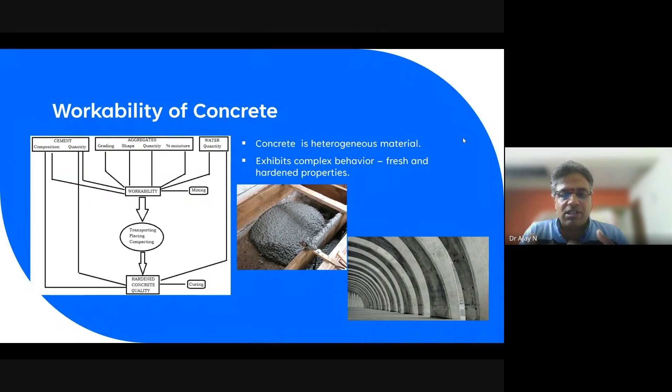As industrialists and structural engineers, we concentrate more on the strength part rather than the workability part, because we require M20 grade, M25 grade, and today we are going with M80, M120 and like that. We are very concentrated on strength, and today we are also moving toward durability studies and sustainability materials. So I can say we are not very advanced in testing the fresh properties of concrete.

Workability means: when we mix the concrete, it should be very easy to mix. Compaction, placing, and finishing should be very smooth, and it should maintain homogeneity throughout, from mixing to transportation, finishing, and compaction. It should not segregate, it should not bleed, it should be a compactable mix, and it should be finishable. All these things together we call workable concrete.

So how will you assess this workability? On what basis do you assess it? Only through measurements. Based on measurement only can we come to know whether the workability is there or not. So how will you measure it?

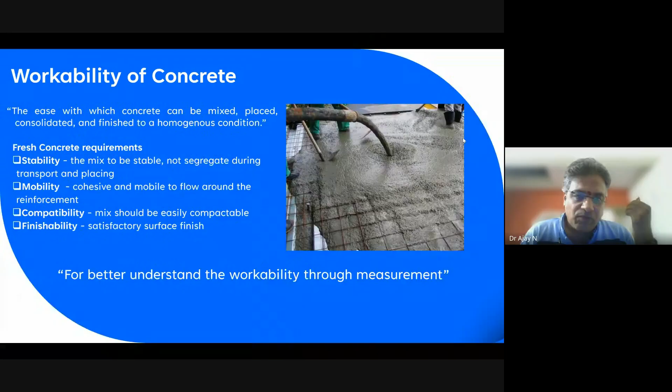Generally speaking, any engineer will say that workability assessment starts with the slump test - this is the very fundamental test. In the laboratory, in engineering terms, we also check with the compaction factor, VB factor, Kelly ball, and flow table test. These are the few tests done as per IS code recommendations for fresh condition assessment. But the ACI 238 code has listed about 40 tests to assess the workability of mixes.

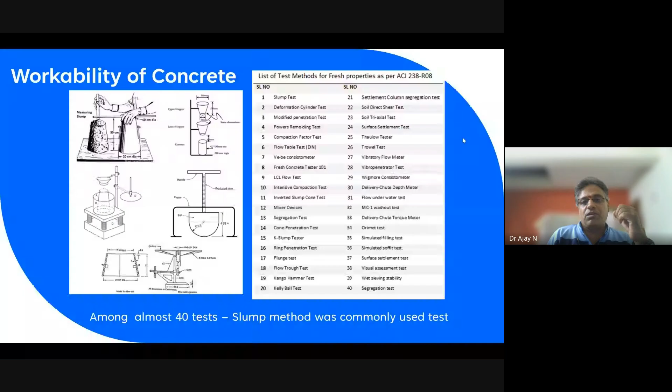Among these 40 tests, we still start with the slump test today, because it has its own merits and demerits - you can say demerits or limitations. What about the merits? It has its own 100 years of history, and irrespective of the concrete - whether conventional concrete, high strength concrete, high performance concrete, or SCC - you can start with it.

When we design mixes, we choose slump values based on the conditions. IS 10262:2019 designs concrete mixes based on slump values, with back reference to IS 456. Based on the application - road, bridges, building - we choose our slump value and our compaction factors. That code book, table number 3, clearly states the slump value based on application, and we use that value for mix design to calculate all ingredients required for the grade of concrete.

So the slump test has its own merits: it is a very simple test and easily handled, it does not require any electricity or additional equipment, and it is more relevant for field application - when we place concrete in the formwork, in the slab or beam, and lift it up, we follow the same thing in the field also.

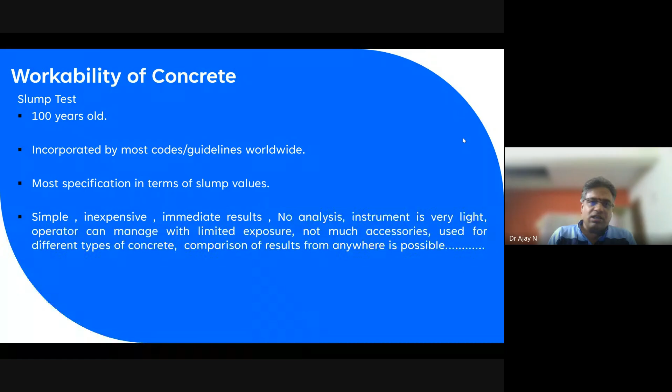And the other part is what will happen: see, concrete has evolved by 2024. As I said, Abrams started these concrete designs, everything, in 1924. At that time, the buildings were low-rise and mid-rise buildings that they constructed. And at that time, the constituents of the concrete were also the basic fundamentals: cement, aggregates, and water. As the application evolved and the requirements evolved, the application also evolved.

So we are trying many admixtures, because we have to cut down the cement content for more optimization. Then we introduced mineral admixtures as fillers, like fly ash, GGBS, rice husk ash, any filler material we are adding to customize, and we optimize the cement content.

So we introduced high strength concrete for the early removal of the formwork and to get high strength, and later on got into high performance concrete and fiber reinforced concrete, and evolved with self compacting concrete, GPC, and nowadays we are going to ultra high performance concrete. Like that, the concrete has evolved completely from 1924 till today. We are getting very advanced and special concrete, as I said, and we are introducing more and more filler materials.

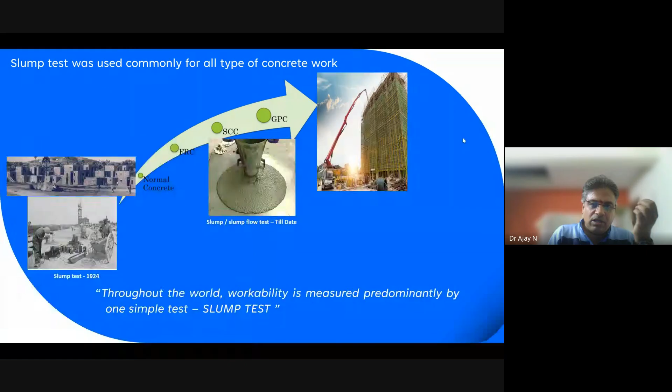But what about the test part? That is the fresh properties, because the fresh properties we are not testing very advancedly, especially for any concrete, because till today we use the slump test to predict the workability. So in 1994, Popovics, a researcher, published one paper saying the slump test is useless, which clearly gives some evidence of the limitations of the slump test. So why is it limited?

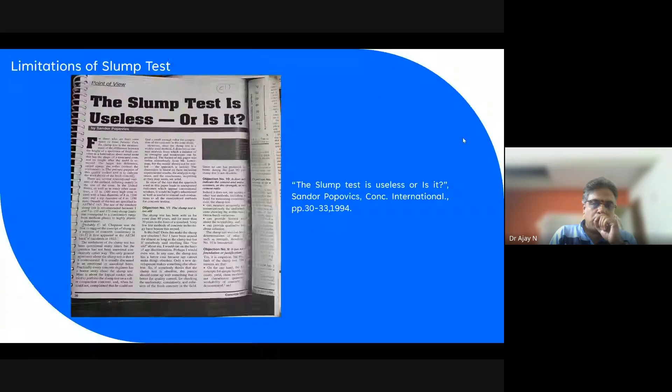Based on this paper, we conducted some experiments in our laboratory, in BMS College of Engineering, during my research work. So first question: the slump test is not suitable for low workability mixes, because IS 456 clearly says 0 to 25 mm for road application. So based on this, we started with low workability mixes in a very conventional method, using only 4 ingredients. We are not introducing any additional admixtures.

In the mixes, we can see here that cement is 300, water is 115. The slump shows 0, because it is a very harsh mix. When we add extra water, 130, 145, scientifically, when we introduce water, it automatically reduces the frictional force between particles or aggregates, so slump values should change. But in this case, what happens? The lower workability mix is still showing 0. So it clearly says the slump test fails to differentiate among the mixes, because we have 3 different mixes but the slump value is the same, 0.

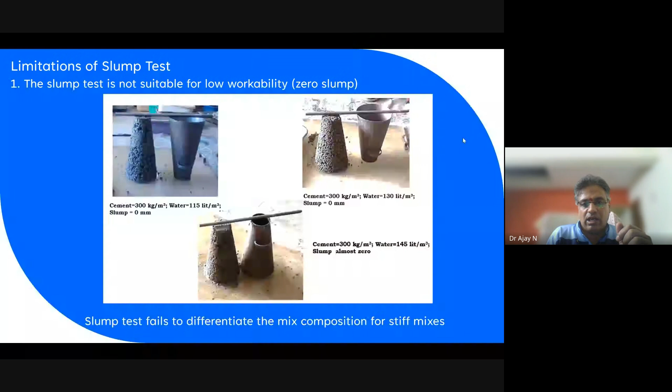Again, another experiment we did with different mixes. These are all experiments we conducted in 2018. Here we chose 300 kg cement and 160 liters water without any admixtures. I am getting 20 mm slump. Again, I am using 450, the maximum and minimum cement content as per the code provisions. Here also I am getting 20 mm slump. So here also I cannot differentiate the mixes.

Which mix is better? From a strength point of view, yes, 450 is maximum. Strength-wise it is acceptable, but economically it is not acceptable, because at almost 450 we can get shrinkage cracks. So I cannot accept it. But the point here is, we cannot differentiate the mixes.

But both mixes have some coincidence, but the values are the same. And the same we apply for the SCC also. Here for SCC we have different powder content, water content, and SP also, more or less 0.05 and 0.1 dosage variation will be there. But the slump flow shows the same thing.

And more or less both give almost the same particle distribution; aggregate suspension is almost the same. Both will be more cohesive mixes, but the values are almost the same, 700 mm. So the slump flow or slump test does not differentiate the mixes, because when we alter the cement and water, it should give some different values, but it's not giving different values.

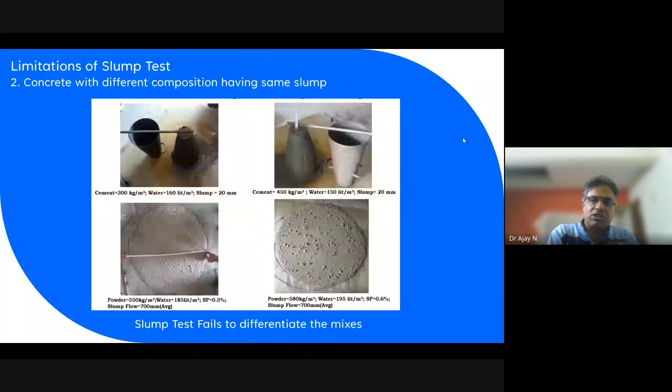That lubricant, when you increase the water content or introduce any high range water reducer, automatically the slump value changes. But in this case, what will happen? It does not differentiate. We cannot make a differentiation. This is another case. First case, we have different mixes, but showing the same slump value. Here we have different mixes again, also showing the same slump value.

And I am trying to do the same repeatability. Continuously, I am doing the same repeatability of the mixes. I am getting different values. First time I am getting 20 mm. I take it out and conduct it again, I am getting 35 mm. Again I have conducted, it gives 40 mm. Like that, it will give different values. It does not give repeatability of the values.

And this may depend upon how we operate. That also comes into the picture. And there is no repeatability in the slump test, and we cannot differentiate the mixes. And the same slump, sometimes without any tapping, shows zero slump. When we do tapping, because of the compaction, voids get released, and it comes down to 50 to 75 mm slump. So these are the limitations we can see in the slump test mainly. It is not only for low workability, it is also for flowable concrete and highly flowable concrete like SCC.

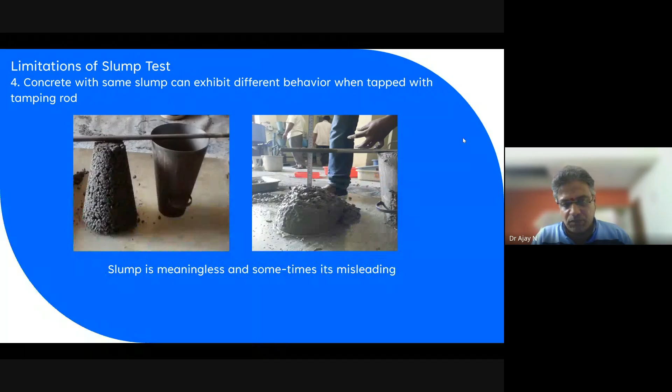In general sense, we can say that the slump is a more subjective assessment. The slump is more relevant for the formwork placement of the concrete, spreading the concrete on the formwork, tapping. The same thing we are simulating with the slump, but here it is not taking account of the pumping effect, that is the dynamic effect. And also when we introduce more powder, it does not give an indication of the more powder, or when we introduce an SP or superplasticizer, it does not give an indication, and it is not giving a proper differentiation of which mix is better.

How will we choose? Because practically what will happen, we require 125 mm slump. We order 125 mm slump from RMC companies. So they will work based on the traveling time and slump loss. They will do 175, then it reduces to 145. Like that, it comes to 125 at the site. Then once they pump the concrete to 10 stories, 9 stories, we are not checking the slump at the place of placement of the concrete. We assume it is the same slump.

But in the end result, what will happen when we attain the strength? There may be a number of factors to achieve the strength, because of compaction, water cement ratio, finishability, placing, everything. But the fresh property is also very important for us to take care of, because the vibration effect, everything has to be taken care of when doing the concreting, but that is not indicated in the slump test.

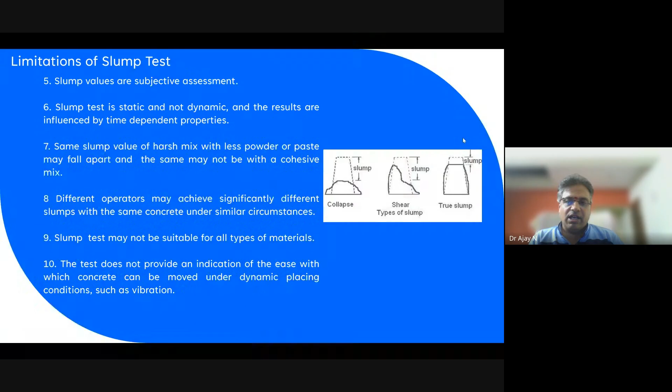And here, sometimes what will happen, we get a collapse. When the concrete collapses, we do not accept the concrete, and when it shears, it is not acceptable for placement. That gives some indication, but we are not checking why it is collapsing, why it is giving shear, why it is giving a true slump, on what basis it gives a true slump. So it is completely a science approach method. So we should know the science, that is what we call the particle distribution method or particle density methods, to be followed.

So because the aggregate is coated with material like your cement and binder, a heavy coating on the aggregates, it acts as a lubricant. When we have a harsh mixture, the harsh mix has more frictional force between aggregate to aggregate. Therefore, we're getting very harsh mixes with zero slump. So when we introduce more water reducers, it automatically acts as a lubricant and it will change the slump values.

So in general, we can say the slump test is not much relevant for today's advanced concrete like SCC, GPC, FRC, lightweight aggregate concrete. The main concern was this is not a material science approach method. It is like a subjective matter, and we take quantitative measurement scales like 10 mm, 12 mm, and here clearly we are measuring the distance. It is based on a single point parameter. We are judging the concrete using one parameter like a distance.

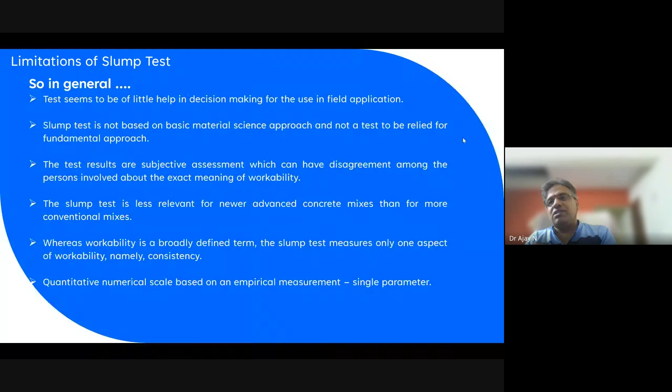In the same sense, we also have some other tests. Similarly, we have VB, compaction, flow table test. All these are based on the application point of view, right? Because compaction we are not generally doing in the field. All these tests we conduct in the laboratory. Here the compaction is based on the height of the concrete, so we are checking the segregation or the cohesiveness of the mix.

And in VB, we are checking how much time it takes for the shape to change from conical to circle. Here we are measuring the workability with respect to time. And in the flow table, it is with respect to distance again. All these methods, slump, VB, compaction, flow table, almost 40 tests as the ACI code says, we call empirical, because we are measuring workability based either on time or distance. And it is not new; back in 1928, 1936 and 1940 researchers gave the limitations of these empirical tests.

T.C. Powers has written one of the best books in concrete technology, because most of the time we are going with the Neville and Shetty books. When we read the Powers book, we come to know that concrete has n number of partial differential equations, so we get very surprised. Concrete also has so many mathematical equations. And in 1983, Tattersall argued again that the slump is a single point test, and we want to look into some better test for concrete.

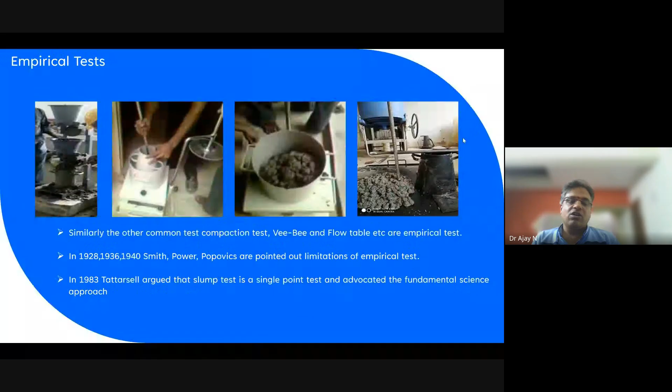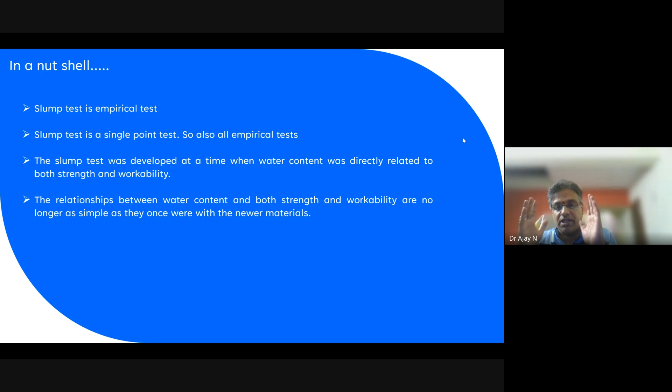So on this basis, what will be our answer? So many researchers have already proved the slump test limitations and other test limitations. Based on that, we are also conducting some tests in our laboratory to confirm what limitations the slump has. Yes, that clearly says the slump is mainly a single point test and is empirical. There is no science behind the slump. For SCC we also use slump flow T500, V funnel, J-ring, L box, U box. Everything is empirical, without any scientific approach behind it.

But when we describe the concrete, we should describe it with two parameters. It is a must for today's advanced concrete, because describing with two properties will give better concrete mixes. We can differentiate which mix is better or which mix we can take for placement. And when you make a better assessment or better test of fresh properties, of course that will clearly give better strength and longer durability for any material, any structure.

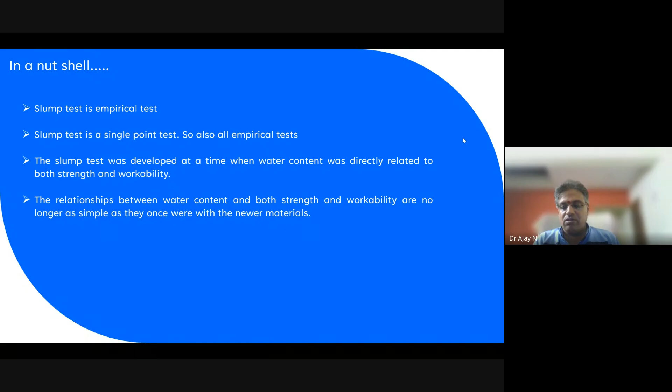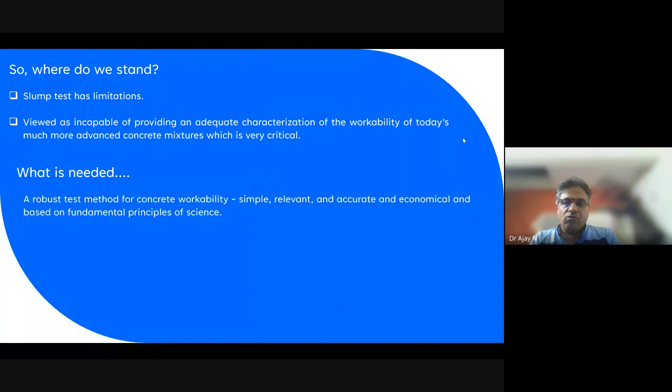So what will be our answer for this? Taking all the previous research, yes, of course slump test has limitations, because low workability mixes give the same value, and for SCC they also give the same values. So for advanced, special and conventional concrete, we cannot describe the difference. We cannot differentiate the mixes. And we require differentiation to optimize the mixes and cost, to make cost cut-downs. So what will be more relevant as of today?

The answer was rheological studies. So why are rheological studies so important for today's concrete? Because concrete has aggregate, and the aggregate is suspended in the mortar, the mortar is suspended in the cement, and again that is suspended in the water. So this is very complex behavior.

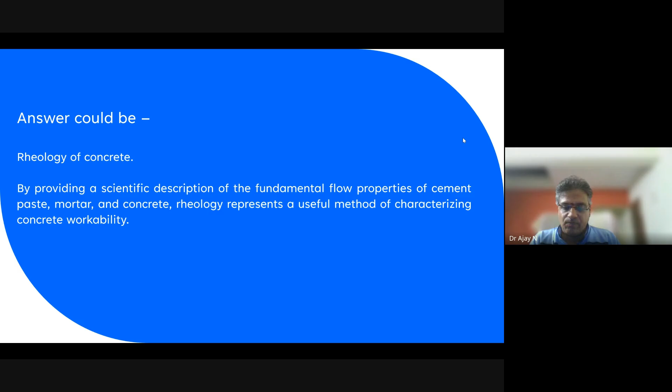For example, if you take a self-compacting concrete, if you add just 0.1 dosage, it will behave very differently. And when you add extra water, it will behave differently. We cannot get the same mixes. We cannot say properly what will happen, we cannot give answers for those things. So for this condition, a more relevant and scientific approach is better rather than the empirical. Therefore, we require a more authentic and scientific approach, which we call rheological studies.

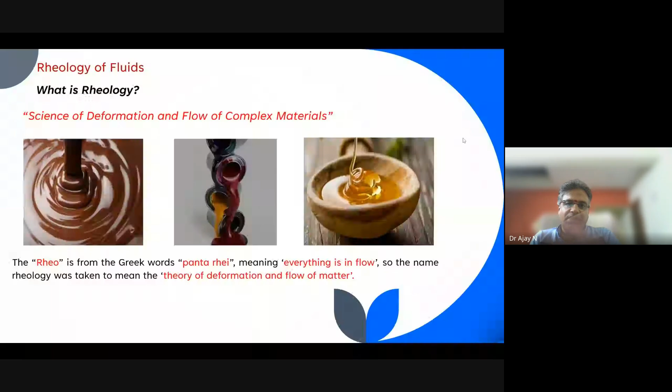Rheology is a Greek word. Rheo means everything is in flow, and logy means study. We are studying the flow properties. Rheology is a very general word, used for all different materials, and we see how it is relevant for our concrete. In rheological studies, we know that there are two types of fluids. One is Newtonian fluid, the other is non-Newtonian fluids.

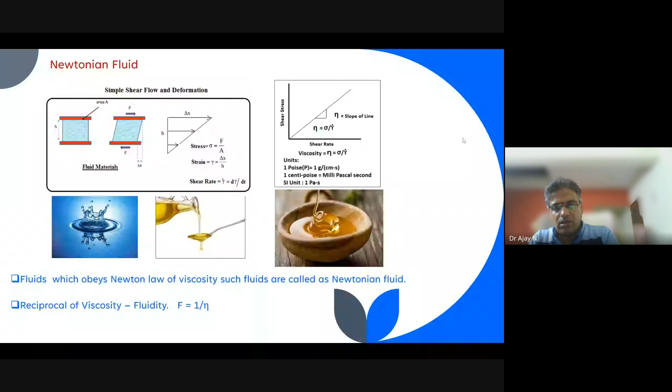For Newtonian fluids, water is the best example, because the shear rate and shear stress are both proportional, and we can easily calculate the viscosity using this equation. And for non-Newtonian, what will happen? We have again classified them as time dependent and time independent.

These are very complex fluids. For example, self-cleaning glass, gels, medicines, any cream, toothpaste, everything we can take as a complex fluid. Time independent fluids are categorized as shear thickening, shear thinning, and Bingham viscoplastic or Bingham plastic, and time dependent as thixotropic effect and rheopectic effect. Rheology of complex fluids is a different domain, so I'm not going deep into these topics.

Among these fluids, concrete is most relevant as a Bingham fluid. Why? Because Bingham, a researcher and physical chemist, developed a mathematical model for these different fluids. We want to calculate the viscosity. That is the main thing. Therefore, using the rheological study, we can predict the complex fluid behavior based on these equations.

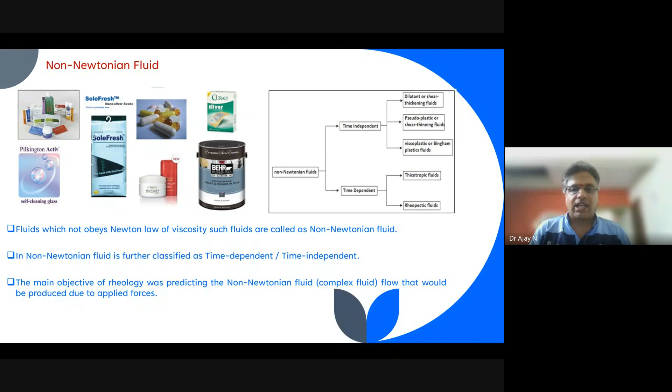See that in 1983 and 1984, they started these studies in concrete technology. Why rheology matters was shown by François de Larrard, who gives a clear picture in his paper, and in 1983, Tattersall brought out that rheology is a must for concrete, because, as I said, the slump or any such method today gives only a single point.

We cannot describe the concrete, we cannot differentiate the concrete, because pumping effect and vibration effect should all be considered in our design, and checked in the fresh property itself. Therefore, the fresh concrete is clearly acting as a complex fluid with complex behavior. As I said, the aggregate is very dense, it is held in viscous cement paste, and the cement paste is concentrated with water. So it will show very complex behavior.

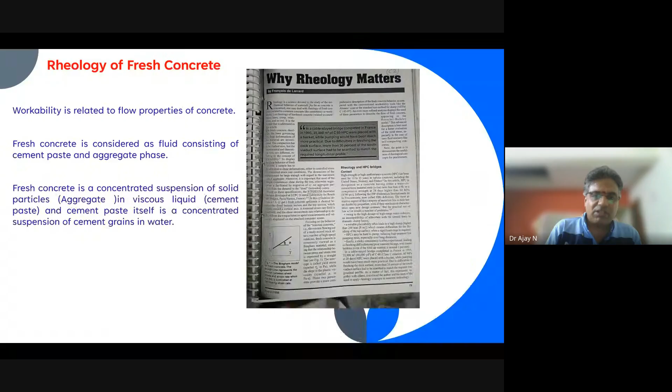When we pump the concrete, see, the rheology of fresh properties means we have to study the fresh properties of concrete, the flow of the concrete. When we pump the concrete from ground to the 4th, 5th, or 10th floor, there will be 2 or 3 bends. So the concrete has to go through the bends without any changes in the fresh properties.

But this type of test we are not conducting in our laboratory, because we are checking with the slump test, and slump does not bring all this into the picture. We just give a slump, design the mixes based on slump, and give it to the site. But in practice, when we pump the concrete for 10 stories, there will be 2 to 3 bends and high pressure. All these effects have to be considered and assessed in the fresh condition.

Also, the placement of the concrete is very essential. What will the slump be at the placement of the concrete? So we can easily determine shear stress and shear rate for these conditions. That is what we call the rheological properties of the concrete.

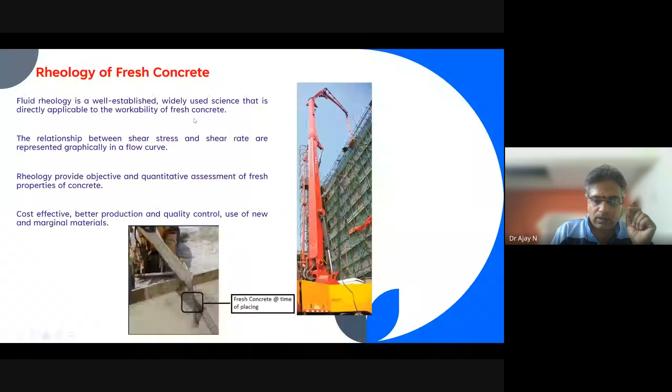And this study started in 1930. He started with the first attempt, followed by 1941, and 71, 73, 70, again 83. Tattersall and Banfill clearly came up with the idea that concrete in fresh condition acts as a very complex non-Newtonian fluid, and they classified the concrete tests into class 1, class 2, and

class 3. Class 1 was qualitative, that is, whether the concrete is workable or flowable. By visual observation, we can give the classification. Class 2 they classified as slump, compaction, VB; all these tests are empirical. And class 3 came through rheological studies. So

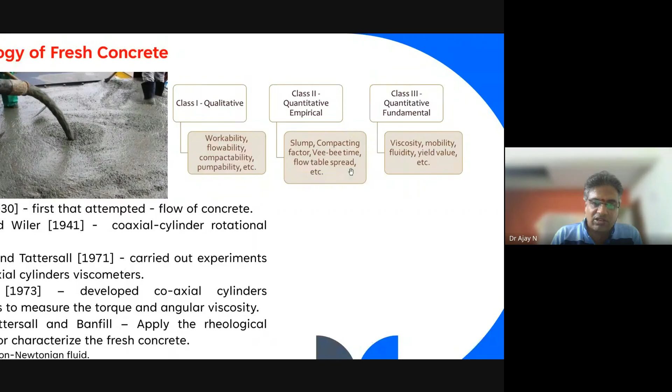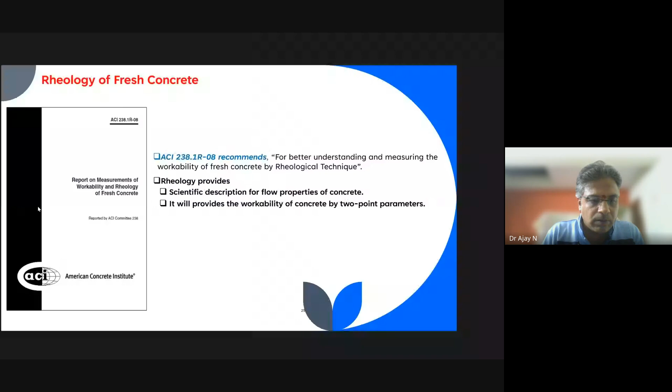here we are discussing more about viscosity as well as the yield stress value. These are the things we have discussed in the rheological studies, and they are actually required for the... And they have continuously done research work on these rheological studies, and in 2008 the ACI code came up and clearly recommended, for better understanding and measuring the workability, only rheological techniques.

Because this code book clearly says that we can describe the concrete in a scientific manner. As I told, in today's concrete we are using ternary blending, introducing more chemicals and filler materials, replacing with C&D waste and with slags. Everything we are making more and more advanced, and we are introducing more and more admixtures. So for this type of concrete, we require a scientific description to check the fresh properties and the workability. So for these conditions, for better understanding of concrete, we require rheology.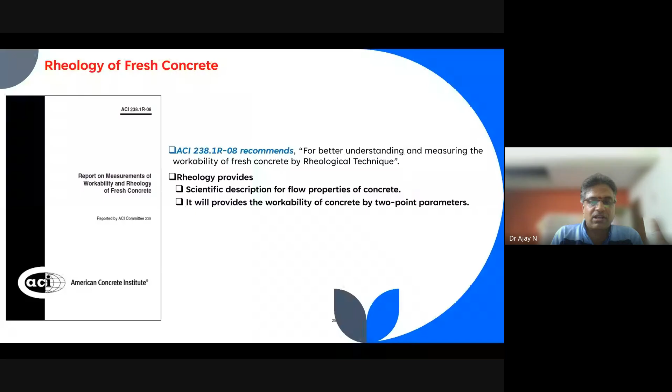So how will you measure rheology? We have to measure the torque as well as the rotations, and this torque and rotation we have to fit with mathematical models. They are developed by Casson, Herschel-Bulkley, Bingham, power law, that is shear thinning, thickening. These are the mathematical models. So these values have to be fitted to those mathematical models. And among these equations, the Bingham equation is more fitted for concrete in the fresh condition, because we are measuring this torque and rotation using rheometers.

A rheometer is a device where we measure the shear stress as well as shear rate, get the output values, and fit them with the mathematical models. Again, we have two types of rheometers: extensional rheometers and shear rheometers. For concrete, we use capillary rheometers and rotational rheometers, and in most cases we use rotational rheometers. And in this, we have different

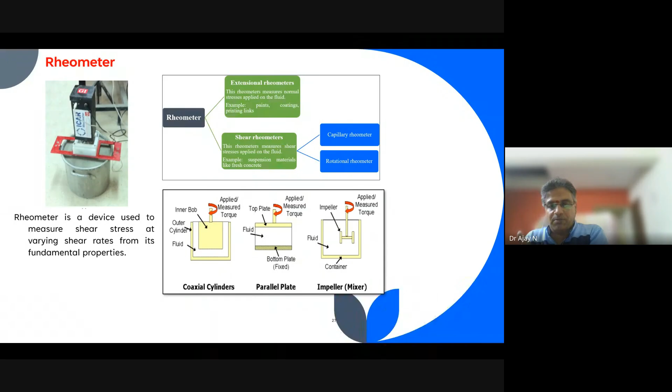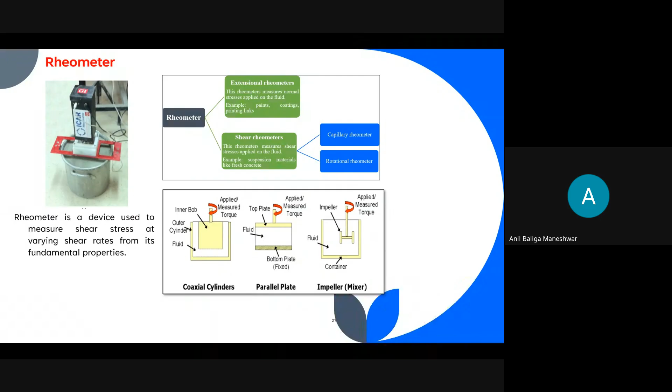Kanishk? Hello, Kanishk? Hello, Kanishk? Yes, we have lost the connection. I'll check. Kanishk? Sir, I'm checking, sir. If you have Ajay sir's contact number, you can reach him, sir. He has lost his connection. He will be rejoining soon. Sorry for that connection issue. Sorry.

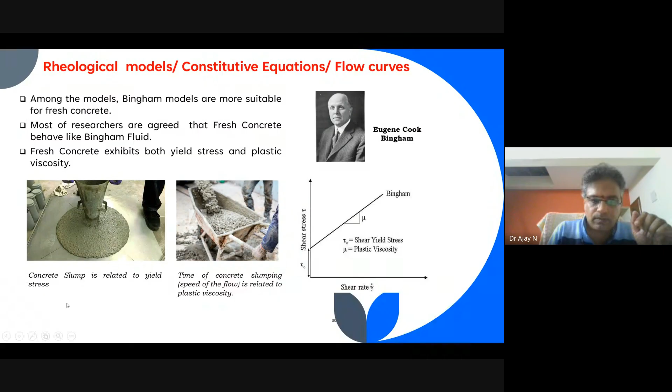But in the case of slump, we cannot differentiate the mixes. Therefore, to differentiate the mixes and to get a better understanding of concrete in fresh condition, we require rheological studies. This is clearly proven, especially for today's concrete, which of course requires more and more properties.

Among these, we have rheometers. What will happen in rheometers? We use them to check dynamic conditions, but most rheometers have been developed for lab conditions, not for field application, so they're not very portable. A few we have are ICAR and some SCC, DP type.

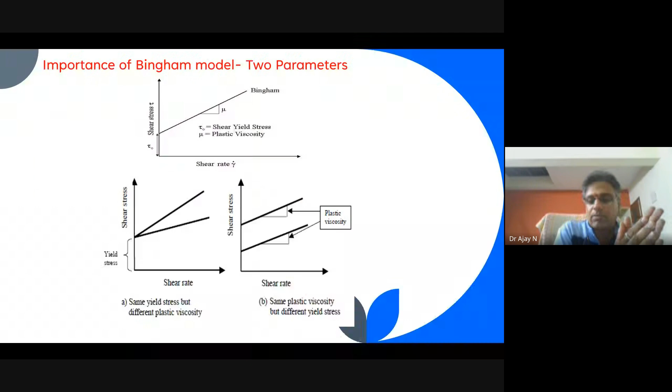Therefore, in 1936, L'Hermite and Tournon studied the shear strength of concrete using a direct shear box. The same system was adapted and carried out in 2007 by our Professor Dr. Girish and Professor Dr. Ranganath, R.V. Ranganath. They adapted the same system to check rheological properties using a small shear box, based on soil properties and shear strength, and conducted tests with good results.

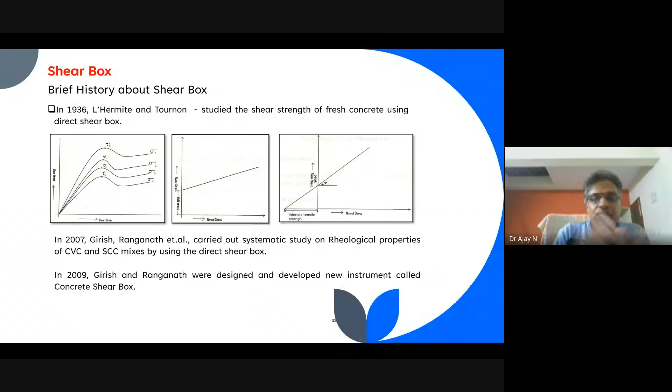Based on that, in 2009, Professor Girish along with Professor Ranganath sir designed and developed a new instrument called the concrete shear box. This is the concrete shear box developed at BMS College of Engineering.

It is a completely sensor-based system, and the principle is the same as used in the small soil shear box; the same methodology is adapted here, but the size of the cube is 150 by 150 as per the standard cube size. We apply normal stress through regulators, we have a gearbox, and we apply normal stresses to the pneumatic actuators. Everything is a completely sensor-based system, and we measure all these things through the sensors. This was developed in 2009.

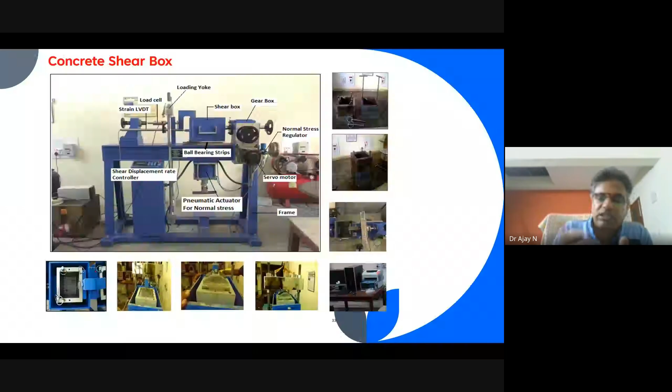Later on, we came to know we had to check the feasibility of this instrument - that is the main aim of my PhD topic. Here we can apply normal stress up to 1 MPa and a maximum shear load up to 50 kN.

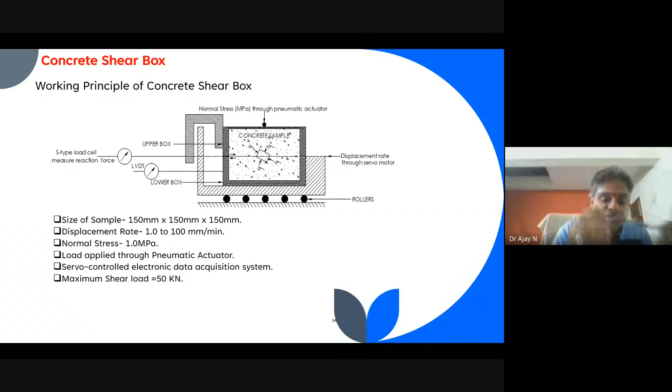In my research work, we conducted tests on all types of concrete: conventional concrete, flowable concrete, and high flowable concrete like SCC, to check the feasibility of the shear box. For M1 to M9, these are lower workability mixes, and M13 to M21 are flowable mixes. So for all types of concrete we obtained both values.

The difference between the shear box and rheometer lies in the principle - the rheometer works on the dynamic principle while the shear box works on the static principle. Here we check the rheological properties after the placement of the concrete in the formwork, whereas the rheometer works while pumping the concrete, considering the pumping effect. We check the concrete after it gets rest following pumping, vibration - everything settled down in the formwork.

So we are checking actual conditions, more relevant for the field application. We are checking the yield stress and viscosity. The rheometer checks these things right after pumping, but we are checking from a more field-relevant application point of view.

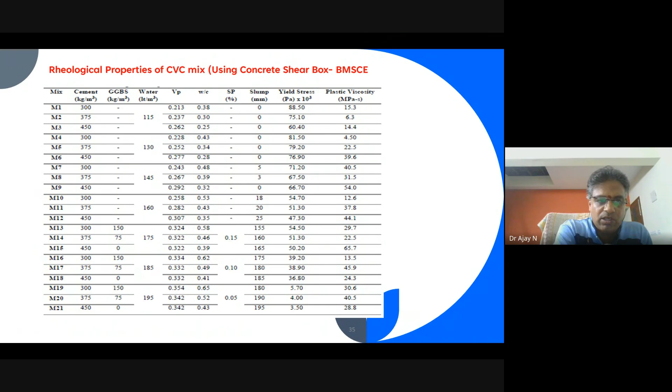The shear box gives all the properties, and you can see the difference between mixes, because M1 to M9 show 0 slump, but using these two parameters we can really differentiate the mixes. We applied the same approach for the SCC mixes also, conducting slump flow, T500, L-box tests. For SCC, we had to assess three properties: flowing ability, filling ability, and segregation resistance.

So we had to conduct 3 to 4 tests to get the confirmation. But when we use these rheological properties, we can easily describe the mixes. From M22 to M48, we have conducted almost 20 to 25 mixes, different mixes, and for every mix we get the yield stress.

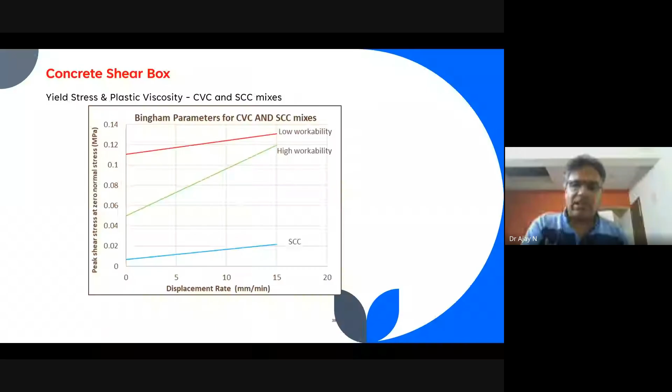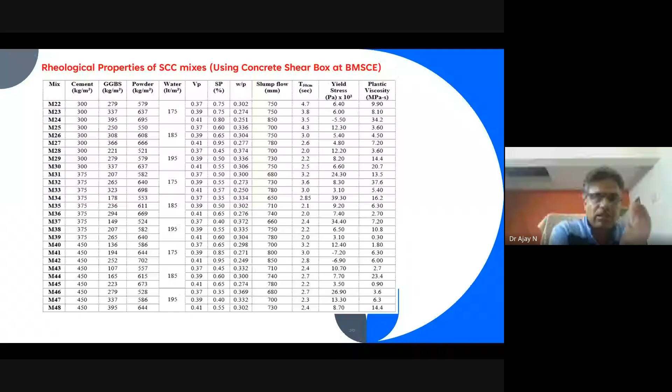What is the relevance of this? To understand these results - in the slump T500 test, we cannot differentiate the mixes. For example, with 300 cement and 0.5 water-cement ratio, we cannot differentiate the mixes using that. But using the rheological studies, we can.

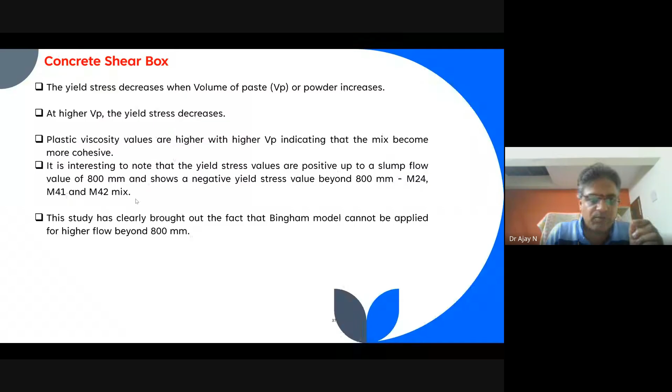Sorry for that. So the main point was that rheology study is very much important for today's concrete. The shear box is giving more authentic results for practical application, while the slump test has its own limitations, and they are all empirical methods.

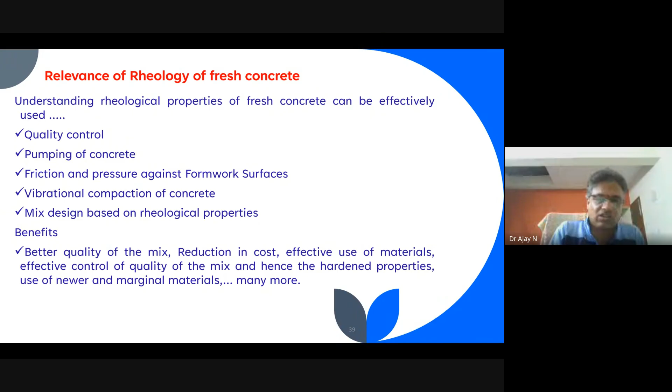In our research, we have also conducted some mix designs based on rheological properties. In the upcoming years, we have to publish some papers on using these rheological properties. Most countries other than India are following these rheological studies based on ACI code. They conduct rheological properties to make better quality mixes and reduce cost - this gives us very controlled, quality mixes for better strength and durability.

Regarding publications, one of our major achievements is that ACI Materials Journal has accepted our concept of the shear box and the results we are getting - everything has been accepted. Other journals like rehabilitation journals, ICJ, and Indian Concrete Journal have also accepted this new instrument that we developed at BMS College. These are some of the journal papers we have published using this shear box.